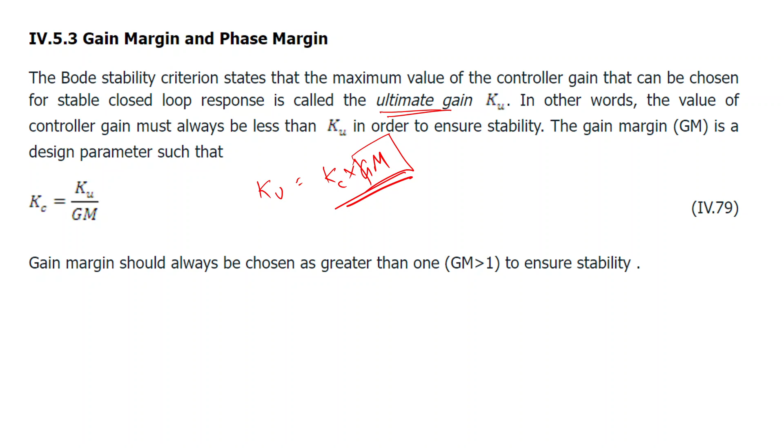So in the last class, we had looked at a few examples related to Bode stability criteria. In this class also, we'll continue with those examples and also cover a few MCQ type simple questions.

So after we are done with Bode stability criteria, we will cover processes with inverse response, take a look at a few numericals related to it, and then move on to the instrumentation part.

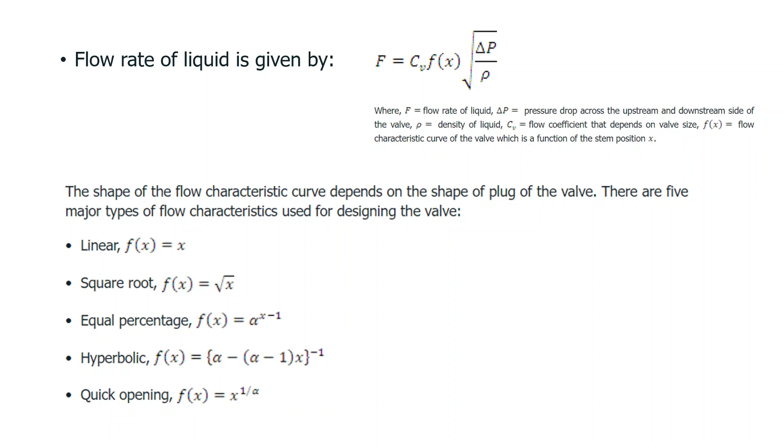So now we'll work question by question, and whatever concept is in that question, we will cover the instrumentation related to it. Today we'll look into the operation of pneumatic valves and their characteristics, and solve the questions related to it.

So until now, we have studied two types of control systems: feedback control system and feed-forward control system. There are other more complex control systems such as cascade control, ratio control, and override control, but until now, we have only studied these two: feedback control and feed-forward control.

The main thing to remember in both is: in a feedback control system, we measure the output, and based on that output, we take control action in order to achieve the set point or reject the disturbance. Similarly, in a feed-forward control system, we take control action by measuring changes in the disturbance. That is how we implement feed-forward control.

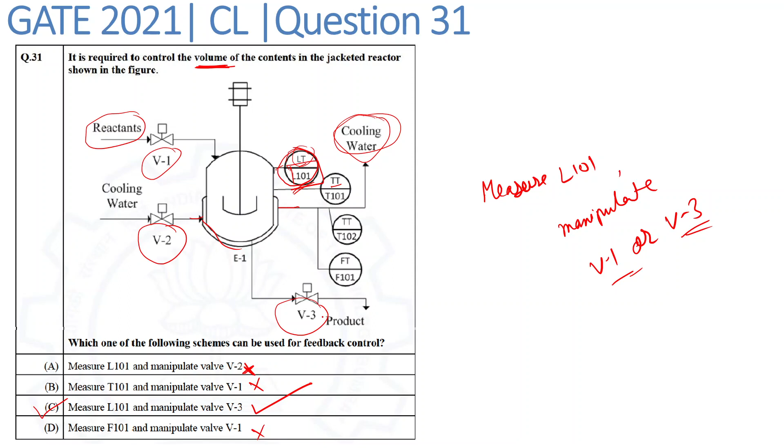Until now, what we have studied is: if we have been given a transfer function, let's say G(s) equals numerator upon denominator, the first thing we studied was the roots of the denominator must lie in this half of the plane, that is, they must have a negative real part. The other criteria we studied was based on the Routh array, and ultimately we studied the Bode stability criteria. There are other stability criteria also, but right now we only studied these.

Let's take a look at the following options. The first option states that a dead-time term must be absent in the open loop transfer function. In each of the criteria we studied, nowhere did we mention this time term in the open loop transfer system. So even if we have any open loop transfer function, any process, the presence of the time term won't be a necessary or sufficient condition for the closed loop control to be stable. That is, even if this time term is present, the system can be stable. So this option is incorrect for our scenario, that is, it is not a necessary condition.

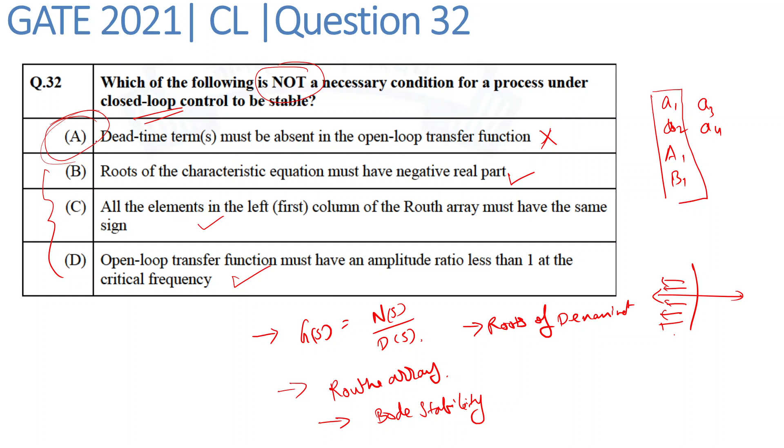So do you have any doubts in any of these questions discussed until now?

So now let's take a look on a few of these numerical related to this Bode criteria for closed loop stability.

The first one is question number 51 from GATE 2017, and the question is: the open loop transfer function of a process with proportional controller Kc is given. Based on the Bode stability criterion for closed loop stability, find the ultimate gain of the controller rounded to 2 decimal places.

So here we have been given an open loop transfer function and have been asked to find the ultimate gain of the controller, that is, find the value of Ku using this Bode stability criterion. Let's take a look at the video solution of this question.

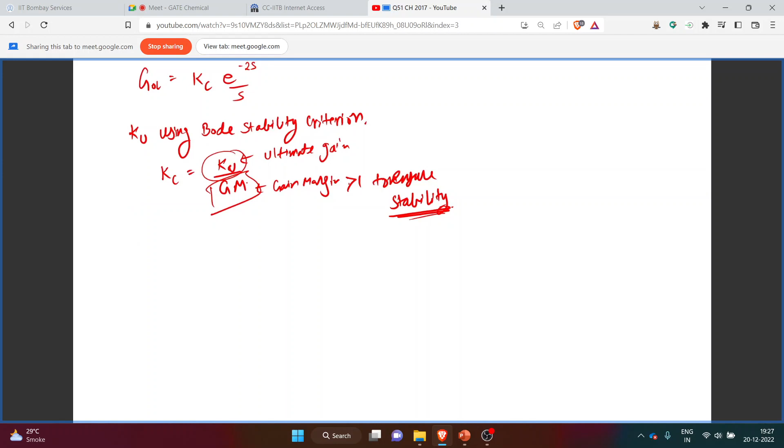So for that, we need to find the value of gain margin. Gain margin can be defined as the inverse of the amplitude ratio at the phase crossover frequency, that is, gain margin equals 1 upon amplitude ratio at omega equal to omega C0.

For this, first we need to find the phase crossover frequency. We can find this phase crossover frequency as the frequency at which the phase lag is minus 180 degrees, that is, phi overall is equal to minus 180 degrees.

For this given transfer function, we can write the overall phase lag as: for Kc it will simply be 0. For e raised to minus omega tau, it will simply be minus omega tau, and we need to convert it into degrees, so it becomes minus omega tau into 180 upon pi. For 1 upon s, the phase lag will be minus 90 degrees.

So we can substitute the values and find the value of omega. This becomes minus omega tau is 2, into 180 upon pi, equal to minus 90 degrees. So we can write this as 360 upon pi into omega equals 90 degrees, that is, omega equals pi into 90 upon 360, that is pi by 4. So the crossover frequency we found is pi by 4.

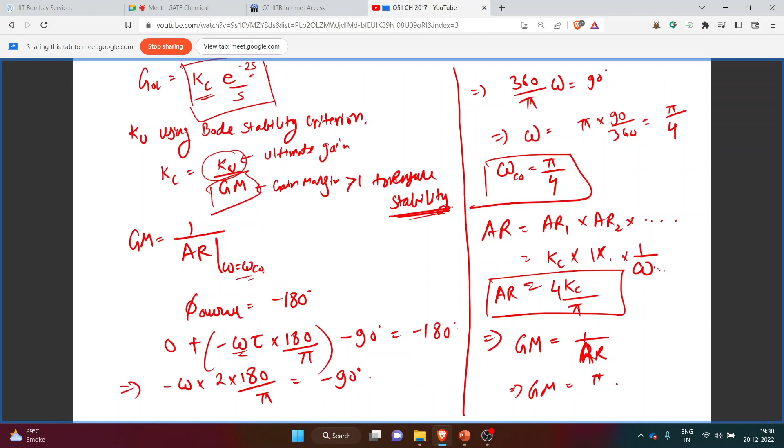So from that we can write the gain margin as 1 upon amplitude ratio. This gain margin will become pi upon 4 times of kc.

Now for this Bode stability criterion, we know that kc is equal to ku upon gain margin. That is, you can write ku is equal to kc into gain margin, and gain margin we found out as pi upon 4 kc. Kc will get cancelled out, and the ultimate gain we can write as pi by 4, or numerically 0.785.

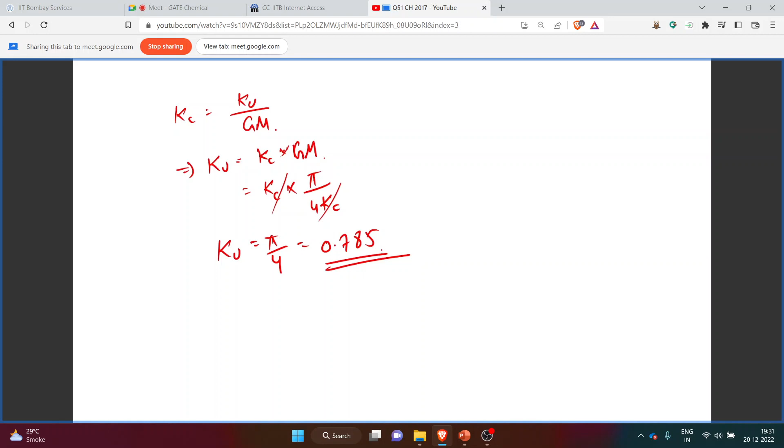So the final answer, based on the Bode criterion for closed loop stability, the ultimate gain of the controller rounded up to 2 decimal places, we can simply write as 0.78.

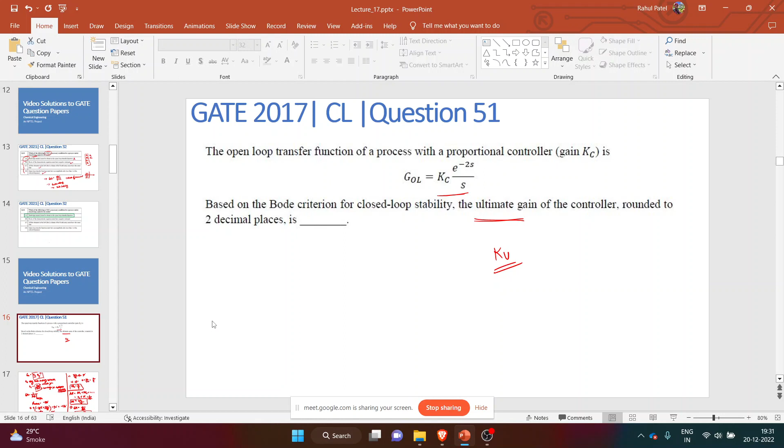So in this question, we calculated the ultimate gain of the controller using this Bode stability criteria.

Now the next question we are looking at is question number 62 from GATE 2015. The question states: consider a control system with open loop transfer function given by kc e raised to minus 0.3s upon 1.5s plus 1. In this function, the prefactor of s is in minutes and kc is the gain of the proportional controller. The frequency for phase margin of 30 degrees is 4.04 radian per minute. The value of kc for gain margin of 1.7 is to be found.

So in this given question, we have been asked the value of kc provided the gain margin of 1.7. Let's take a look at this solution.

So we were given this open loop transfer function, that is kc e raised to minus 0.3s upon 1.5s plus 1, and gain margin was provided as 1.7. This gain margin was calculated at the phase crossover frequency of 4.04 radian per minute, also given in the question. Using all these three pieces of information, we have to find the value of kc.

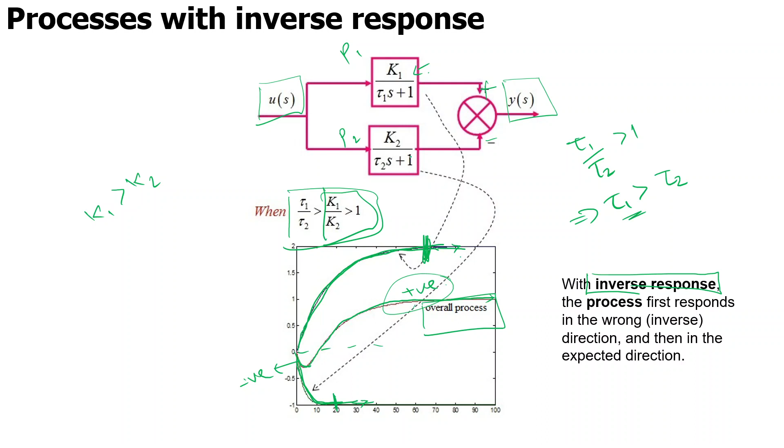Now for this given block diagram, we can write the output as, here we have this plus and minus, so the second term will be subtracted from the first term, and we get the output response as this equation: K1 upon tau 1 s plus 1, minus K2 upon tau 2 s plus 1, and this is the input.

We can simplify this to get such a form. So let's further write it as, let us consider this as tau a s, and K1 minus K2, s, upon tau 1 s plus 1, tau 2 s plus 1. In this slide, the s is missing in both terms, so it will be present over here.

So in general, the transfer function of processes with inverse response we can denote using this equation, where tau 1 and tau 2 are the time constants of the individual processes present in the system, and K can be called the difference of the process gains of the system, that is K1 minus K2, and tau a, you can say, is the weighted average based on K1. Tau a you can simply calculate from this term.

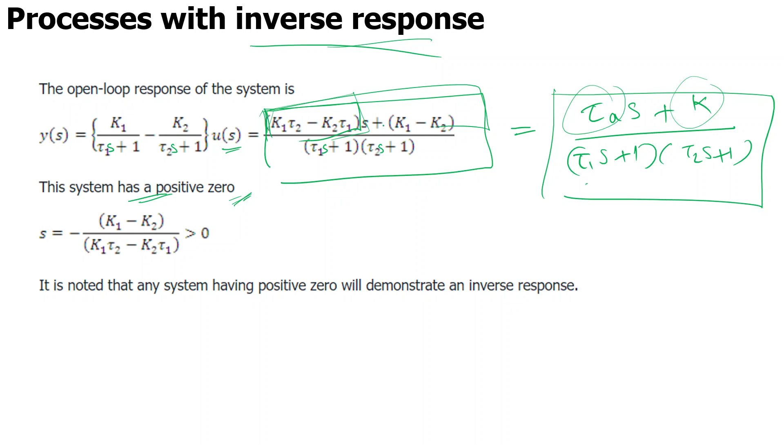Now, other characteristics of processes with inverse response is that this system has a positive zero. So given any process with an inverse response, it must have a positive zero. If more than one zero is present in the system, then at least one of them should be a positive zero, only then can we say the system has an inverse response. Zeros are defined as the roots of the numerator, whereas poles we already defined as the roots of the denominator. So in this case, the zero will be the root of this numerator, that is K1 minus K2 upon K1 tau 2 minus K2 tau 1.

So this is the zero of this process, and since both of these terms k1 and k2 were positive, and k1 was greater than k2, similarly we had this criteria for tau 1 and tau 2. So ultimately this term will always be greater than 0 for a process with an inverse response. So these two things we have to keep in mind.

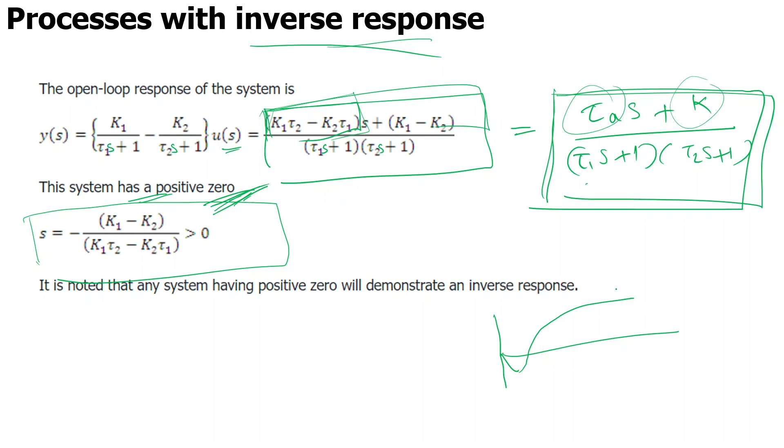So given an inverse response, we can write the transfer function of this general form, and for any inverse response, we will be having a positive zero, and the response will exhibit a characteristic whereby initially the direction of the response will be different, but ultimately it will change its direction. So these are few of the characteristics related to processes with inverse response we need to account for.

Now we'll take a look at a couple of examples related to this inverse response. First is a straightforward MCQ from GATE 2016, and the question is: a system exhibits inverse response for a unit step change in input. So over here we have been given an inverse response for a unit step change in input. Which one of the following statements must necessarily be satisfied? So we have to find which of the following statements is correct for the inverse response for a unit step change in the input.

The first option is: the transfer function of the system has at least one negative pole. So using this criteria, that is using the poles of the system, we can't comment on the inverse response of the system. We need to analyze the zeros of the system. So the first option is an incorrect one.

The second option states that the transfer function of the system has at least one positive pole. So this pole won't be sufficient to say about this inverse response. So both of these options are incorrect.

The third option is the transfer function of the system has at least one negative zero. So for the system to have an inverse response, the zero must be positive. So option C is also incorrect.

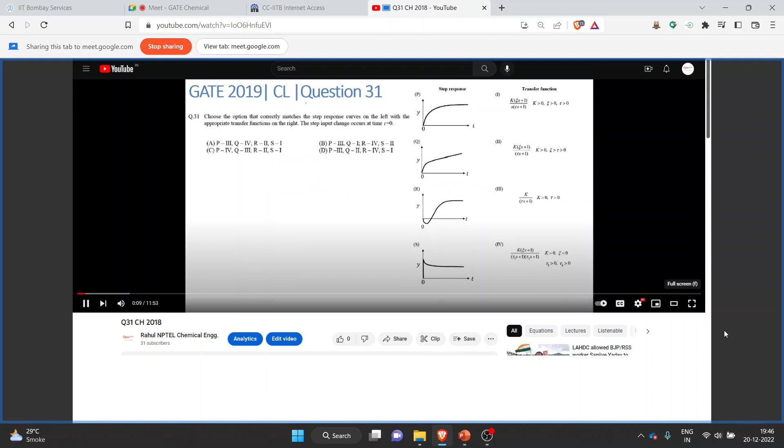So let's take a look at the video solution of this question. This is the last question we are discussing today. We are solving question number 31 of GATE 2019 chemical.

So over here on the right hand side, we have been given this transfer function, 4 different transfer functions. And on the left hand side, we have been given the step response corresponding to the transfer function. We have to find which one of the following plots belongs to which transfer function. So let's take this step by step, starting with the first transfer function.

So over here, one is k times (zeta*s + 1) upon (s(tau*s + 1)), where k is greater than 0, zeta is greater than 0, and tau is greater than 0. To find the response corresponding to this transfer function for the step input, we have the step input u(s) as 1 upon s. So we can find the response as y(s) equals g(s) into u(s), that will be 1 upon s into k times (zeta*s + 1) upon (s(tau*s + 1)).

One of the more complicated methods to find the response is to take the inverse of this equation, getting the relation between y and time, then matching which option corresponds. The other approach is to find the initial value and final value of each transfer function and compare. Since in each plot the final value and initial value differ, we can use this to distinguish them.

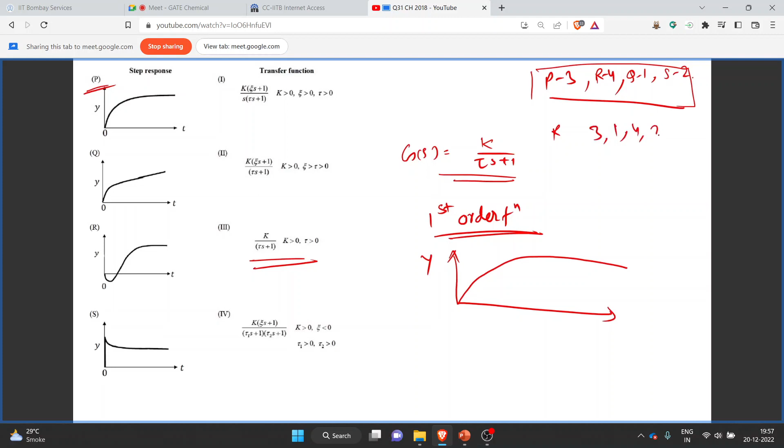Now we'll select the correct option from the given MCQs. So we are having this sequence of PQRS, that is 3, 1, 4, 2. Now from the given options, we can see that 3, 1, 4, 2 corresponds to option B. So option B is the correct answer.

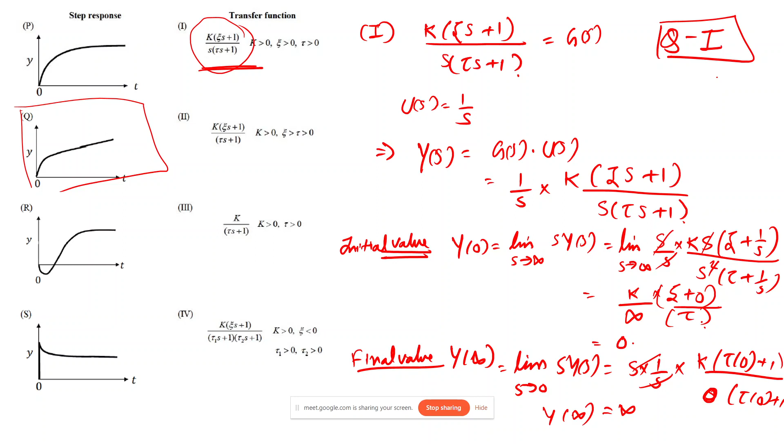So we looked at this question in which we had to analyze the response of the system given the transfer function, whereby we had this first order system inverse response and the other two custom transfer functions. We used the initial value theorem and final value theorem to find the initial and final state of the system, and then checked them with the plot to find the correct transfer function.

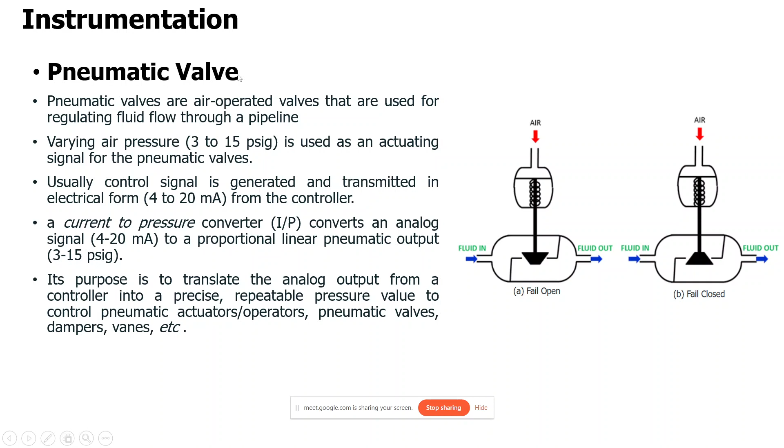So in the next class, we will be looking onto instrumentation. First of all, we will be studying the pneumatic valve and look at a few questions related to these pneumatic valves.